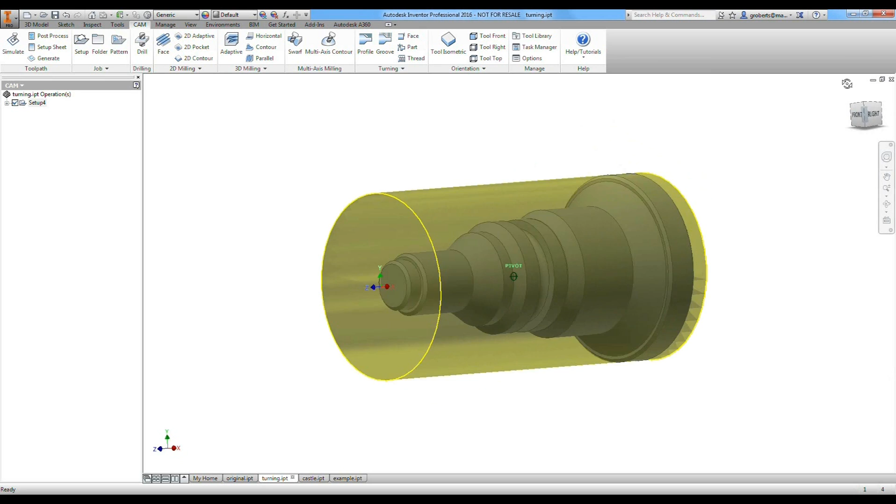To start off, we'll be working on this little part. It's just a basic part where we're going to be using a facing toolpath, a profiling toolpath, a grooving toolpath, and finally we'll part it off. A bit later on in the webinar, we'll go on to use a lot more of the turning features on this more complex part. So we'll be using the chamfer toolpath, we'll be using threading, we'll be using a 2D contour because this is a mill turn operation. We're using drilling and tapping, and obviously we'll part it off again.

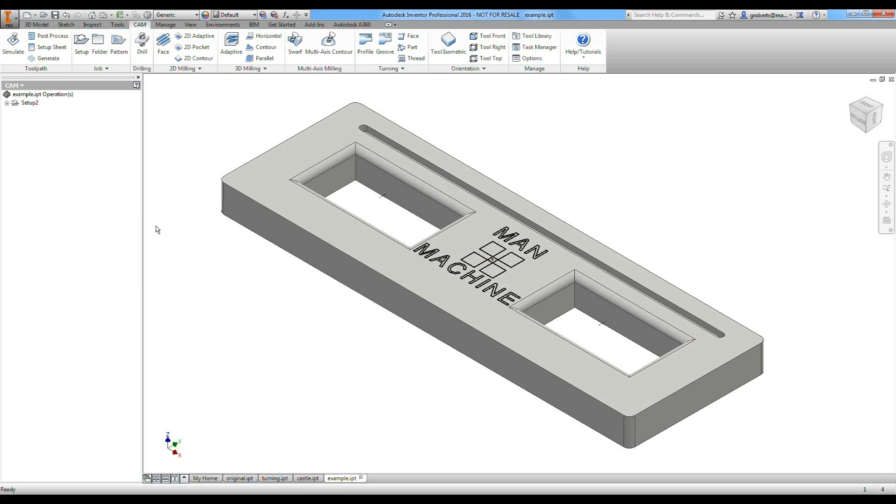As well as the turning features, I'll go through a few little tips and tricks you can use just to finish off the edges of fillets. I'll go through engraving, because these are a few questions that we've been having before. How to engrave, how to finish off fillets, and how to do a slot toolpath, as the slot is different to a 2D pocket. So we'll come on to that a bit later on. And I'll show you a few examples of turning features. So we've got just a little castle here, which is using mill turn.

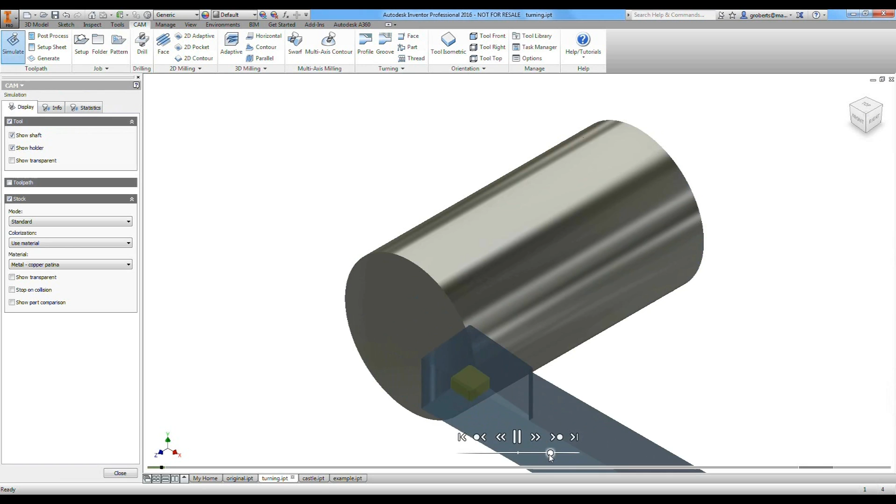Okay, so we'll start off, we'll just work on this part. I'll run a simulation first to show you what we should end up with by the end of the creation. So we're going to face off, to start. And then we'll run a profiling toolpath, speed it up a bit. We'll run grooving, and then we'll part it off. So this is the finishing part that we should end up with.

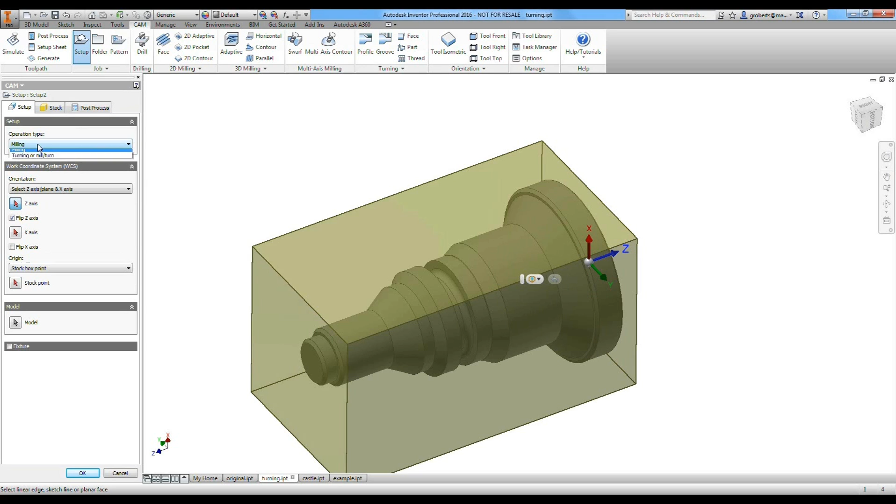So we'll go ahead and we'll close the simulation, and we'll minimize this setup, and we'll start from scratch. So we'll create a new setup, and you'll notice that there's a new option been added in here inside the operation type called turning or mill turn, which we'll select for now, and we'll just set the Z-axis to be about this circular here, and we'll set the origin to the stock front.

So we can go into the stock section and we can change the mode now to fixed size cylinders, tubes, or from a solid. For this demonstration we use a relative size cylinder, and we'll say there's a radial offset of 0 mm. So we've got some stock on there which is basically cut to the outer diameter here. And we'll just give it a name, we'll just keep it as 1001 for now, and press OK. And we've got the setup in.

So the first operation we're going to do is a facing toolpath. So we'll just click face here. And we'll just choose a tool, same as we would if we were milling. We'll go into tool by type, but instead we'll choose any turning tool. And we can just choose one of many tools that are in here. If you want, you can create a new tool by just either making a library or going into the part you're doing now. So we're using turning part.

And we'll choose new turn tool. And you can see there's a little preview of the tool that we're making here. We can head over to insert, and we can define a lot of different inserts inside here. We can set the size of the inserts, we can set the cross sections, which are for the inserts as well, and the tolerances, the relief angles, and obviously the thicknesses.

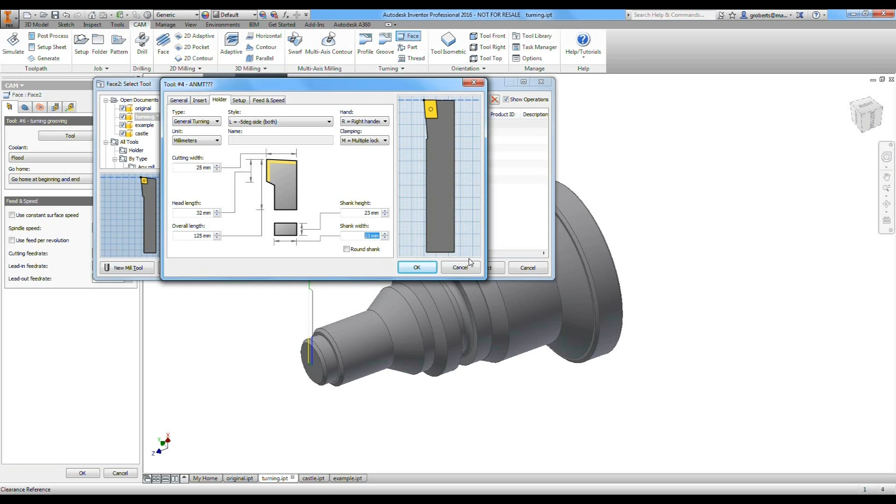You can also set different sizes of holders. We can take the holder off. We can set where it's clamped. We can set if it's left hand, neutral, or right hand. And we can set all the widths and the heights of the holder. For now, I'll just use the default ones that we've got in here, and I'll just select this one at the top. Press select. And we've got the tool in here now.

So we'll go over to the confinement section. We don't need to confine it because we're just going to be facing the part off. So we'll just leave all the other tabs now. We'll keep lead in and lead out and press OK.

And now I'll run a simulation just to show you the facing toolpath. You can see the tool's just going a straight line down to face off the part to the model front.

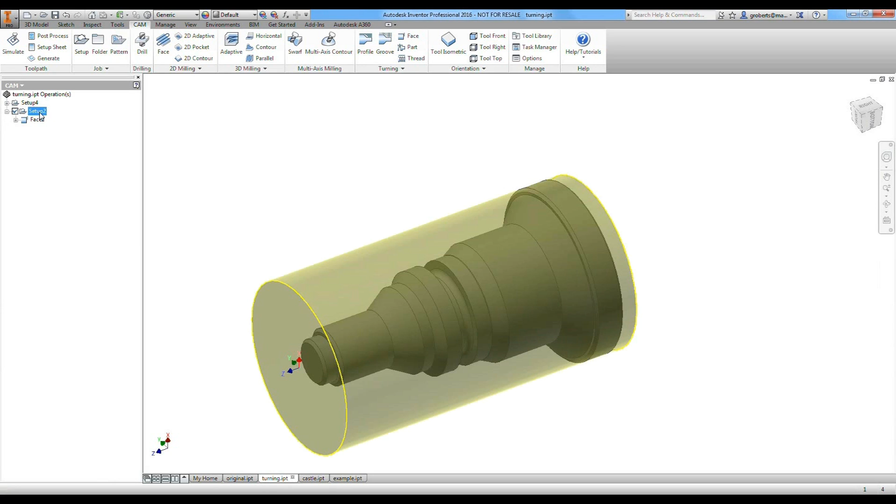The next option we want to create is the profiling toolpath. So we'll just choose profile. And we'll use the same tool for this, so it's already selected from the previous operation. And we'll untick Allow Grooving. Obviously we're using the profiling tool for now, so we'll untick Allow Grooving.

We want it to go from the front to back, and it's going to be outside profiling. You can use this option for inside profiling, and you can change the orientation of the tool if need be. So we'll just set that to 0 now, so it's a straight tool. We can set the spindle speed and the lead in feed rates and the cutting feed rates here as well. But I'll just leave them for default as this is only a demonstration.

And we'll go into the next area. We can leave confinement, but we'll tick rest machining as we've already faced up the part and we don't want it to go over there. We'll head over to the passes tab. We'll untick finishing passes for now, and we'll keep the roughing passes. Go to linking, and we'll keep in lead in and lead out moves. Press OK.

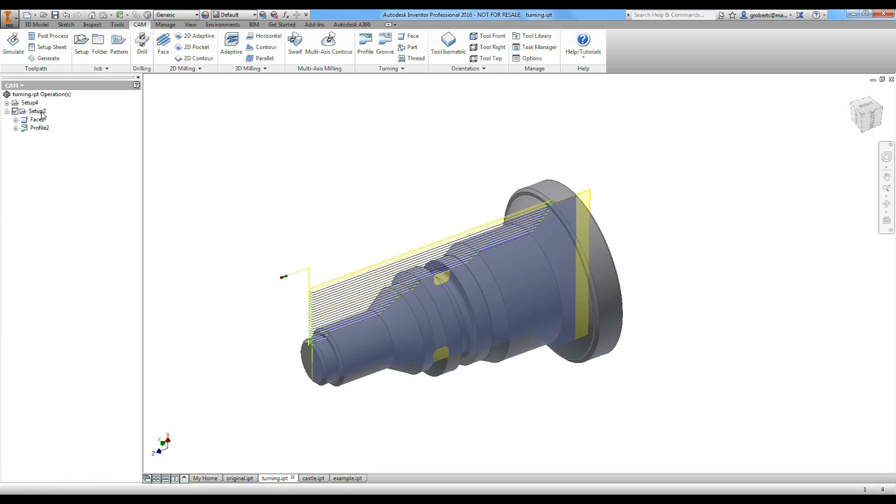And again, we'll run a full simulation, and we'll see the part be faced off. And now I'll speed it up a little bit. It can take a while. And we'll see the part being profiled now. The collision detection worked exactly the same as in milling, so you'd see at the bottom a red icon if there was a collision, and we can set it to stop on collision if needed. But there's no collisions in this, it's just a simple part.

So we'll close this simulation down, and we'll go ahead and we'll create a grooving toolpath now. So we'll just choose Groove, and it's automatically selected a grooving tool for us. But we'll go into the library, and we can just select another one if need be. But we will just use the one that's been selected, and press Select.

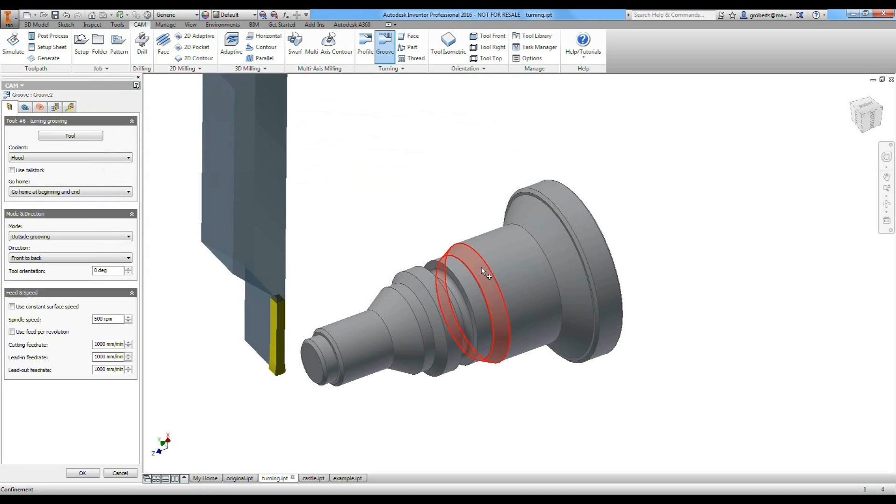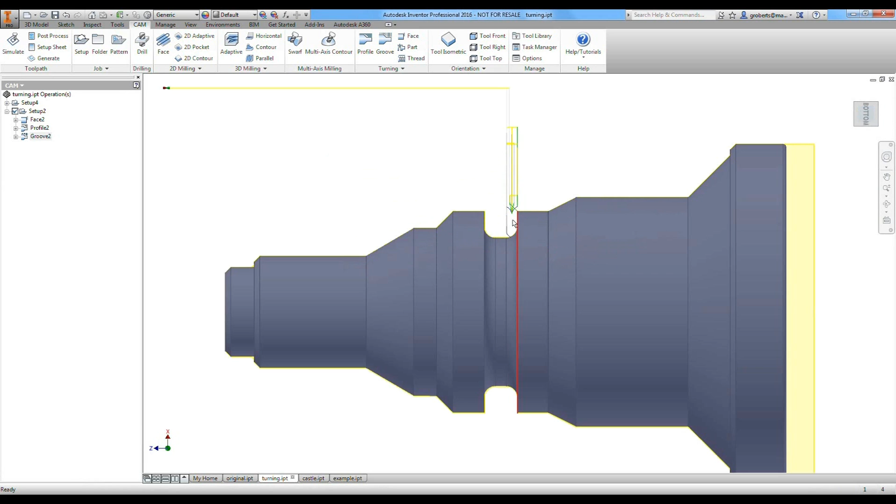And we'll go to the Geometry tab, and we'll choose Confinement. And we'll say Confine within this area. This is only going to groove within these areas that's been selected now. And I'll just press OK. And you'll see the grooving toolpath been added in. So we can run another simulation on that. And we'll jump to the grooving operation. You see that the grooving has been done. And we'll close that up.

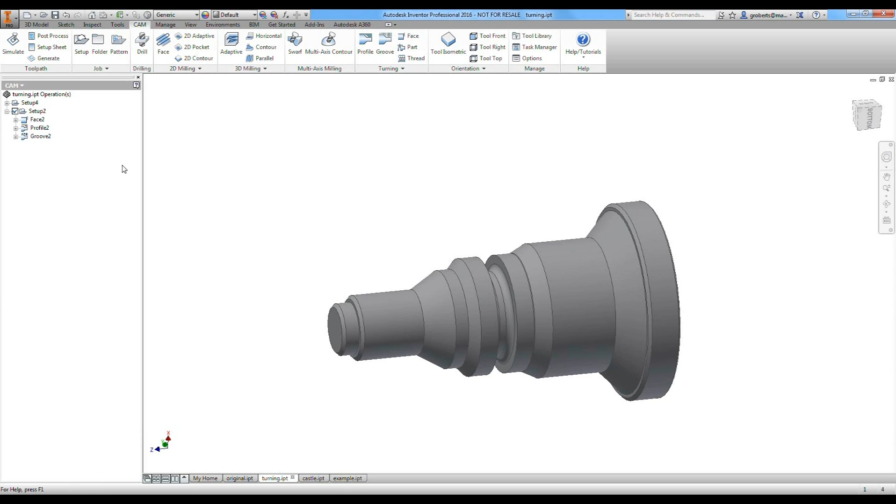So now the final thing on this part is to part it off. So we'll just choose Part. We'll keep the same grooving tool and press OK. So now we've got it parted off. So the whole job will be finished now, and we'll run a simulation on the whole part. I'll just jump across the sections. So jump to the grooving. See grooving is done. And then you'll see the final toolpath parts off.

And that's this file finished. We've gone through the facing toolpath, profiling, the grooving, and parting to finish the part off. So we'll leave this part now and we'll go on to a more complicated one.

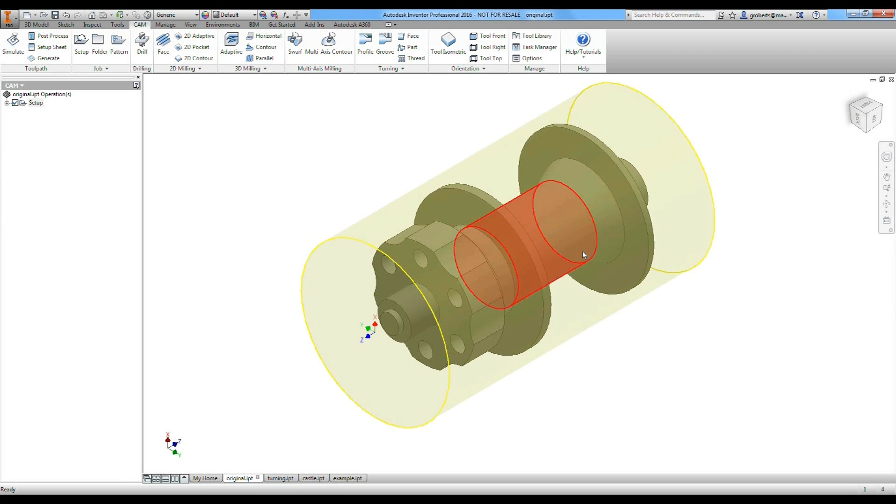What we've got here, we're going to use quite a few more of the strategies. Like I said before, we're going to use 2D profiling, we're going to use drilling, tapping, threading. We're going to use a chamfer, so we can add a chamfer on even if it hasn't been drawn. And then we're going to part off again.

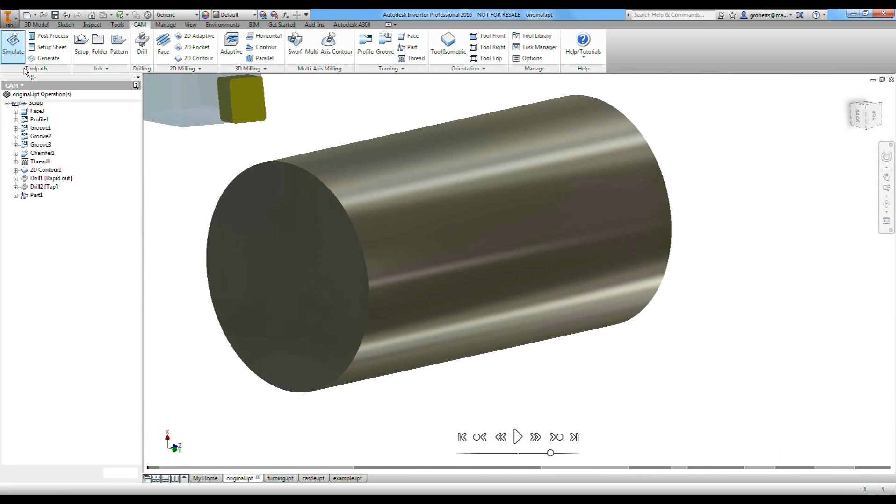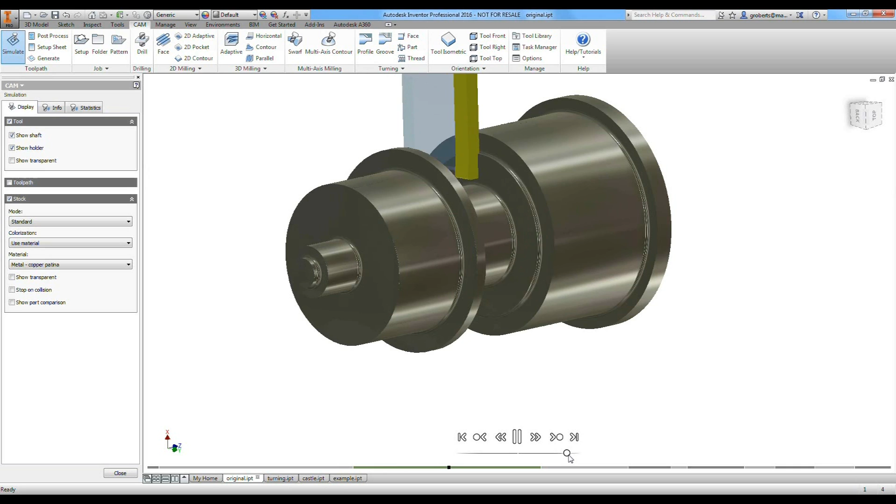So I'll run a simulation to show you what we should end up with. So I'll play the simulation, just face it off. Now we're going to be profiling. I'll speed it up a little bit. So it's going to go through and just profile the whole part first. And then it will come and groove the centre part which I've selected. And then after this it will groove the rear of the part.

And then it will come and groove the front of the part. So after that it puts a little chamfer on, and it threads the part. It does a 2D contour, drilling, tapping, and then parts off. So we should end up with this as our finished part. It'll be quite a complex file if you're going to program this manually, but this will show you how easy the turning features are in Inventor HSM.

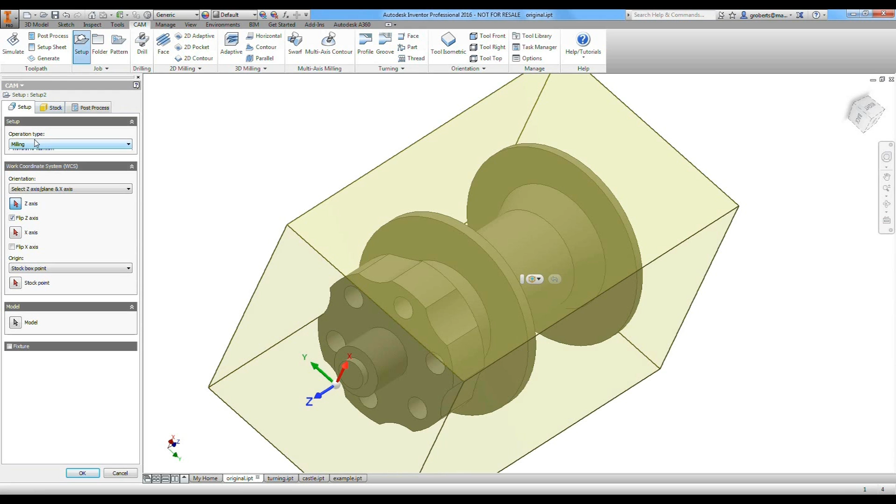So we'll close down the simulation, and we'll minimize the setup, and again we'll just work through it from scratch. So we'll create a new setup. We'll change the operation type to turning or mill turn. We'll choose a Z-axis, and we'll make sure it's from stock front. We'll keep the Z-axis on this side.

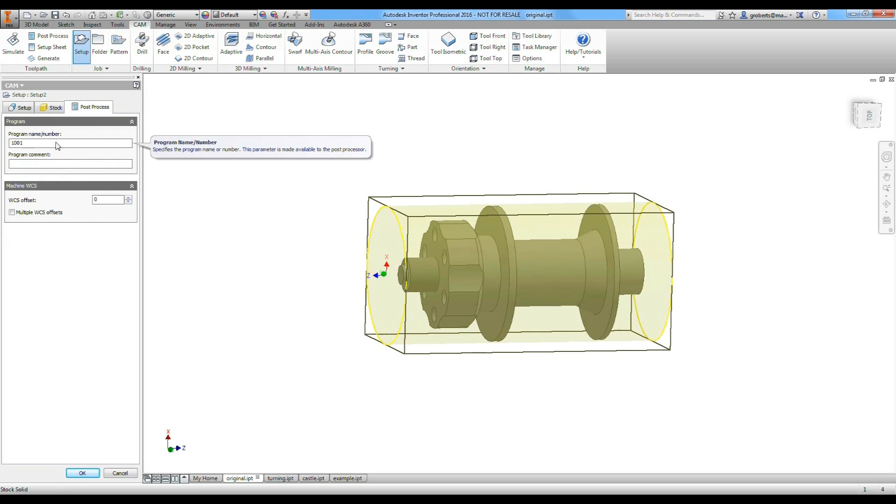And we'll come over to the stock. And it's a fixed size cylinder now, which is a bit too big for what we're doing. We'll say it's a 45mm diameter cylinder. And we'll give it a name, so we'll call it 1002 this time. And press OK. Okay, so the first operation we want to do again is face off.

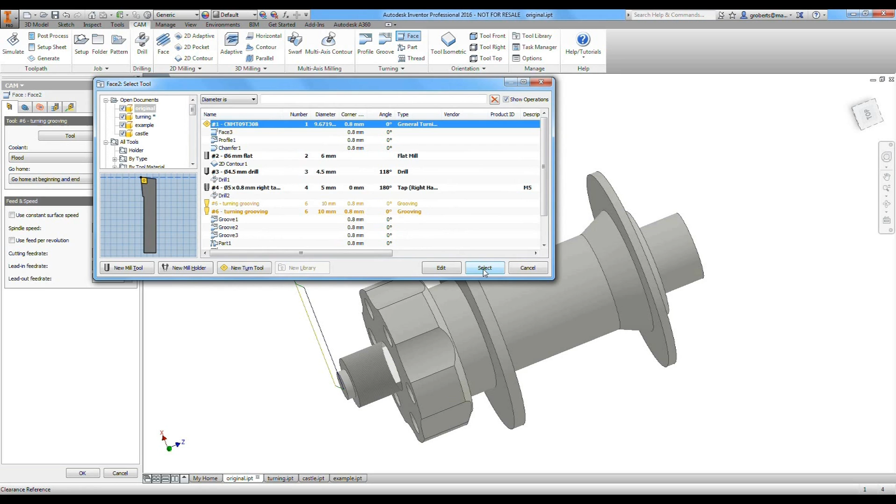So we'll choose face. And again, we'll choose a grooving tool, a profiling tool, and press select. And then just press OK. We'll keep the default feeds and speeds. And we've got the facing toolpath done, so we'll run a quick simulation just to check there's no collisions. And that's fine. So we'll close that off.

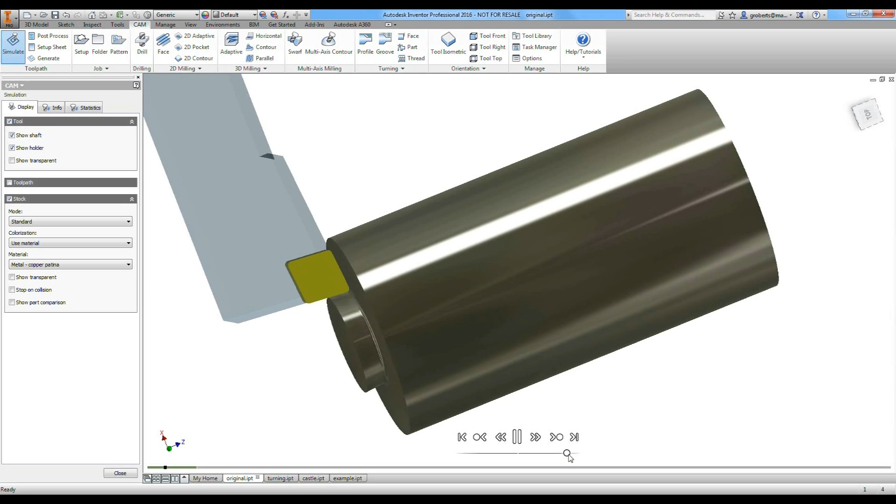And now we'll go over and we'll choose to profile the part. So we'll use the same tool again. Disable allow grooving. And we'll untick finishing passes for now. And we'll press OK. So now we've got the profiling operation done. We can run simulation again and check for collisions. And you see there's no collisions at the moment. None are showing up at the bottom. So that's fine.

Now the next operation we're going to do, again, is a grooving operation. So we'll just choose groove. And we'll confine it this time between this area and this area. And press OK. And then we'll create a derived operation. So this is going to keep all the speeds and the selected tool. And all we're going to do is just change the confinement area. So I want to now confine it from the front here to here. And press OK.

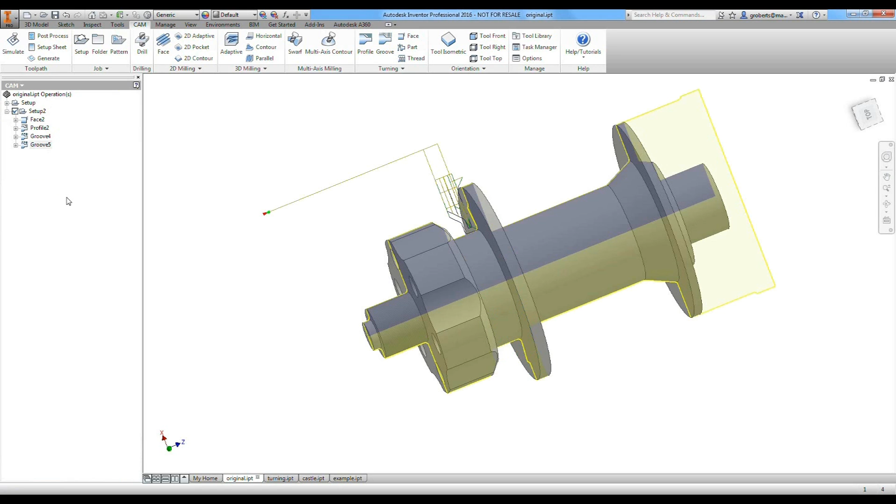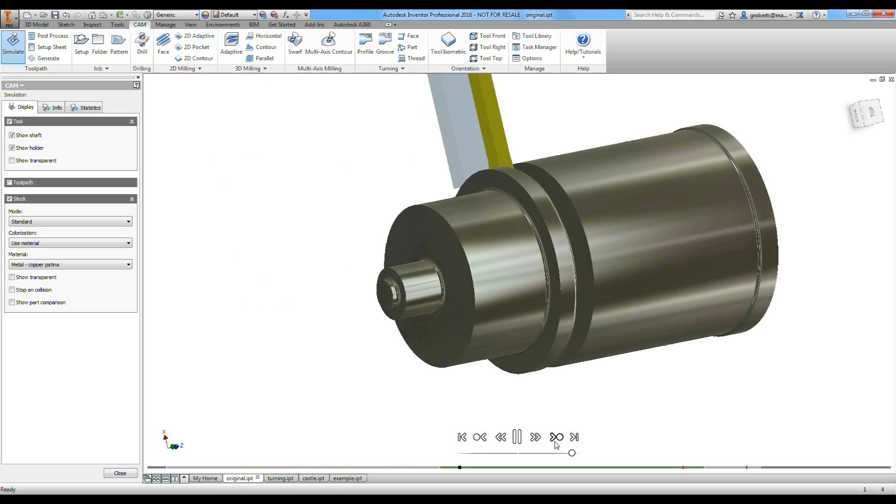And then we'll create another derived operation. And we'll confine it from here to here. And press OK. And that's going to groove off the back. So we'll run a simulation now and just check if there's any collisions, which we can see there's a few here. We'll run it through and see why they're colliding. You can see it's grooving. And looks like it's on the finishing pass it's colliding.

So I'll turn off finishing passes for the grooving tool just for these first two operations. So we'll come here and we'll untick finishing passes. And we'll do the same on this one. I'll untick finishing passes. And then we can check the simulation for collisions. And you can see now there are no collisions. So we'll close down the simulation.

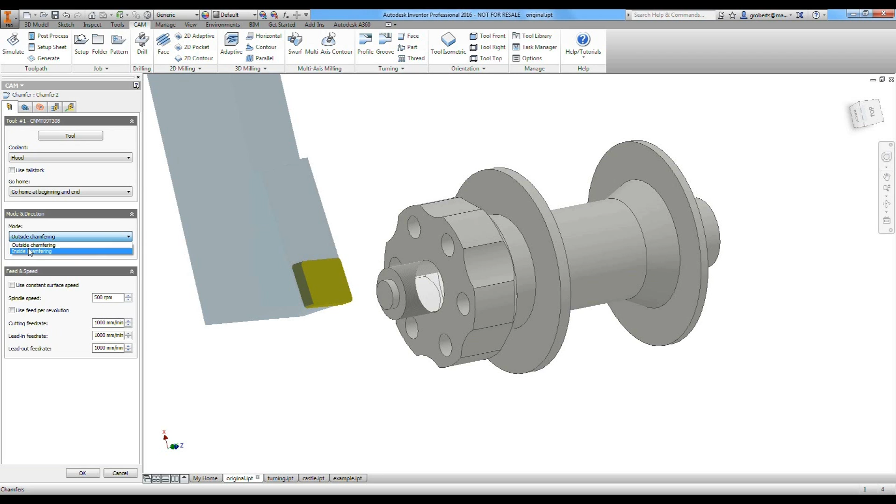And the next thing we want to do is add a chamfer onto this edge here. So we just expand the turning tab. We choose chamfer. And we'll choose our profiling tool that we used first. So it's outside chamfering we're doing. We can choose it to do inside, but for now we'll just choose outside chamfering. And we'll choose the outer edge to chamfer.

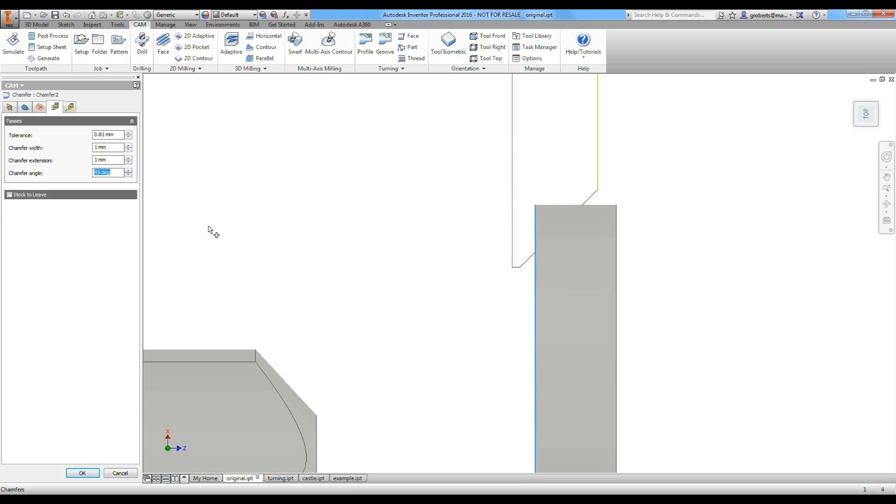So you can see the preview of the toolpath is adding a chamfer which goes through the model, so the chamfer doesn't need to be modelled. You can just do it on any edge that's selected. And you can set the chamfer width, the chamfer extensions and the angle all in this passes tab. So I'll just set this as a 45 degree 1mm by 1mm chamfer. And we'll leave everything else. And press OK.

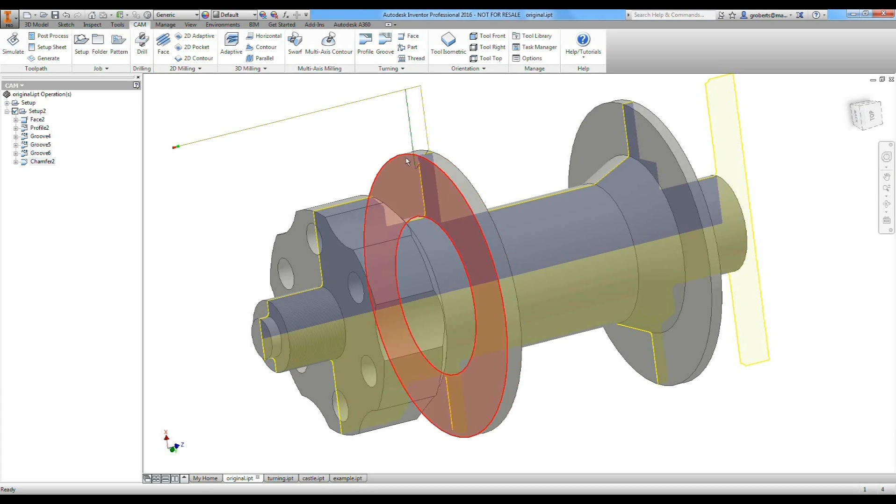And a good way to see the chamfer, because when you run a simulation the model is always visible. So if you cut through the model, you'll see the model behind, which obviously the chamfer is going to be cutting through. So a nice way to see the simulation is to switch over to the model tree and right click on solid bodies and just hide the solid bodies. Then switch back to the CAM tree and run a simulation. This will give us a better visual simulation, as we can see the chamfer, and we won't see the model sticking out from the stock.

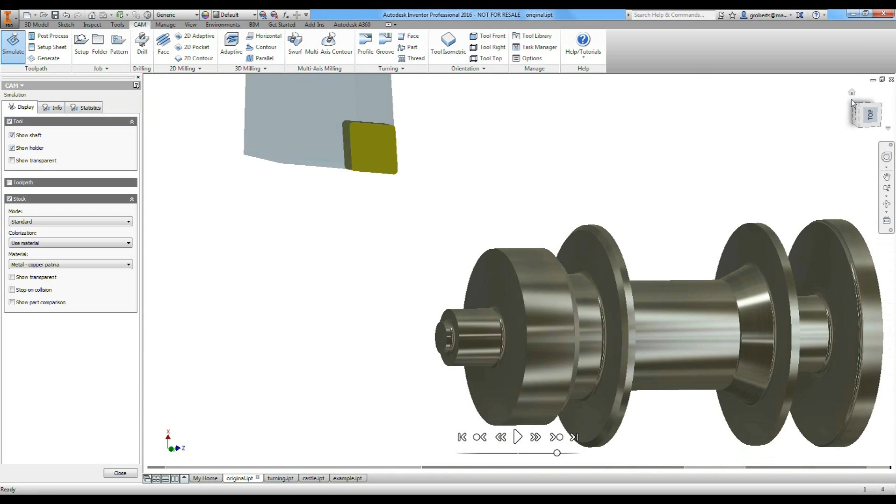So it's running the grooving passes, and then it comes through and it will add a chamfer on. And as you can see, the chamfer's been added on with the profiling tool very easily. So the chamfers don't even need to be modelled. You can just select them, and it will put the chamfer on for you.

So we'll close down the simulation, and we'll just make the solid bodies visible again. And we'll head back to the CAM tree, and we'll make a 2D contour now. So we're just going to cut around the edge of this part. So we'll choose 2D contour, standard milling operation, and we'll choose the 6mm flat.

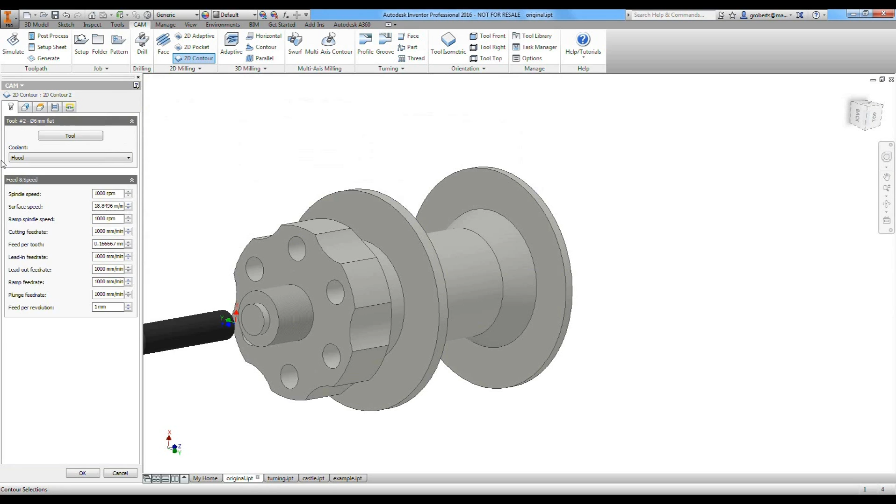And we'll select top contour, and I want it to come down to the bottom height here. Just going to mill down to the bottom. I can set it to go to the bottom there, and then press OK. And you see the 2D contour is added on like so.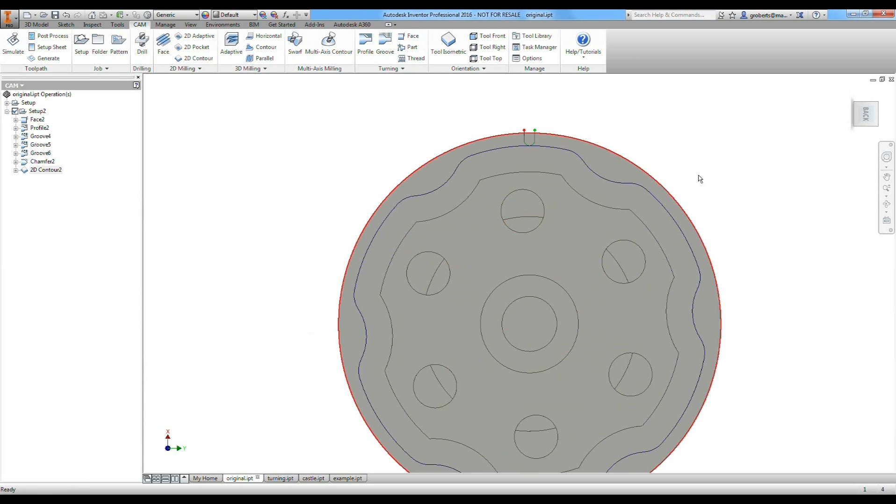So we can do that with all milling operations, as this is a mill turn program. You can choose any mill turn or milling operations, and they're all accepted inside the turning. So another one we're going to choose is drilling. So we'll just choose drill, and we'll choose a 4.5mm drill, and we'll select this whole face, and then choose select same diameter.

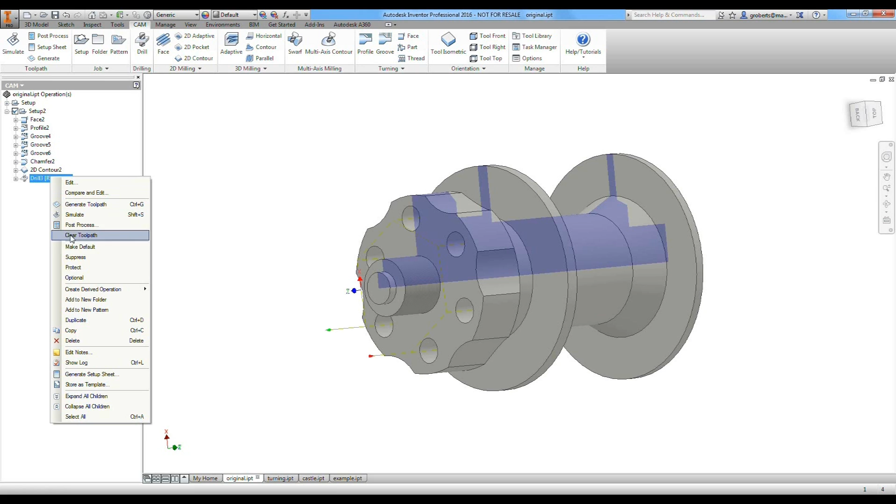So now we'll just press OK. We'll leave the standard drilling cycle, just drill in and rapid out. We could change this to pecking if we wanted, but for now we'll just leave the standard one. And we'll right click, create derived operation, drilling, drill, and we'll change the tool to a tap.

So we'll use a 5mm right tap. And we'll switch over to cycle, change the cycle type to right tapping, and press OK. And now we've got drilled holes and tapped holes.

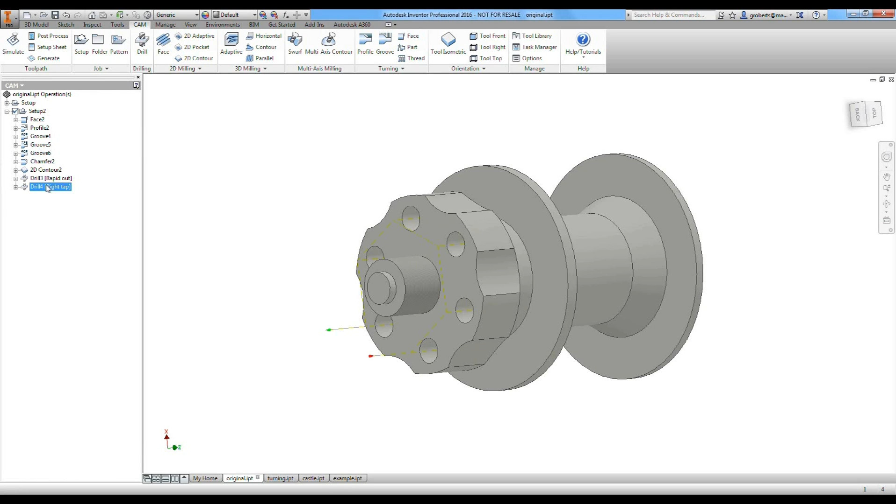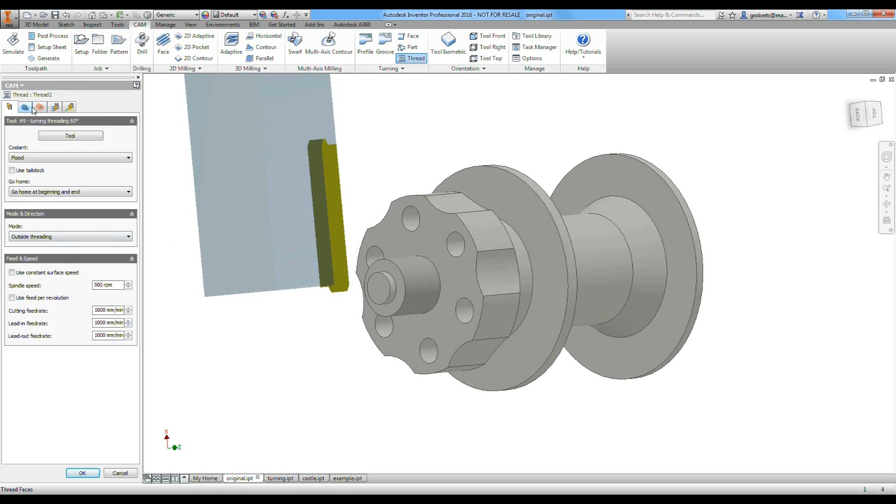Okay, so the next thing we'll go through is we'll put a thread using the turning feature called thread on this front face here. So we'll just choose thread, and it's already selected a default threading tool, which we'll keep for now. It's set as outside threading, which is fine, because we're doing outside threading. And we'll choose the thread faces here.

And now I want to set a backside offset. As you can see, it's going to go into the model. So we'll set the backside offset as, let's say, -2mm, just to bring the thread a bit further back. And you can see the little angle that's bringing out on the thread. This is going to fade the thread. So if you don't want this angle there, you can just untick that and it will come straight out.

So it's a right-handed thread. We can set the thread depth and the thread pitch in here. I'll leave the default ones for now and just press OK. First off, I'll just show you the number of step downs so you can see here the thread's going to be done 5 times. You can lower that down in here, so say 2, and it will just thread it twice. And just press OK, and that has been created.

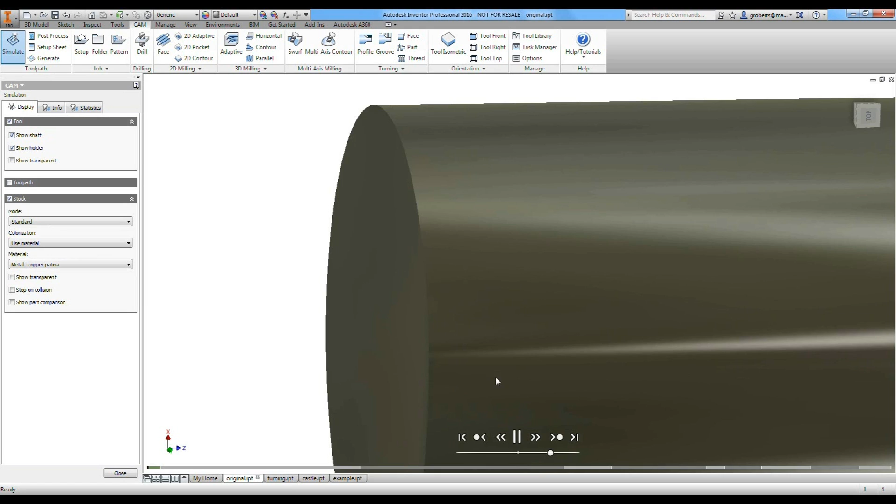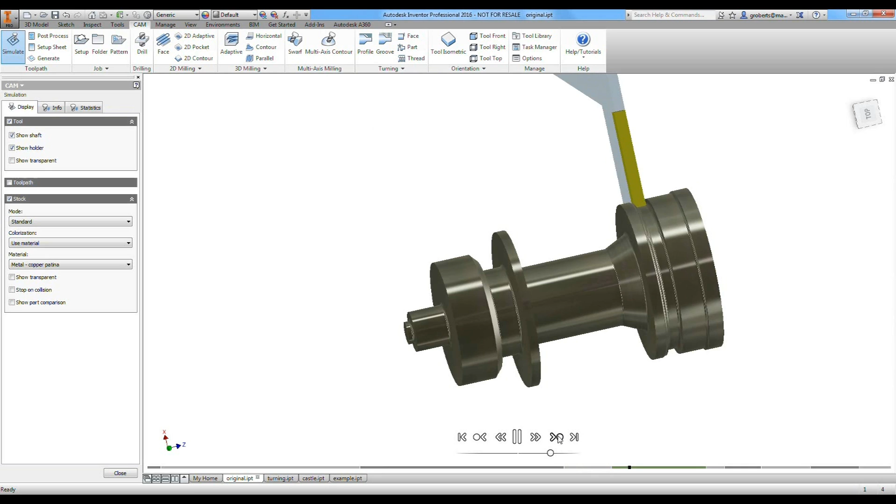So what we'll do is we'll switch off the model visibility again, and we'll run a full simulation on this setup. So it's facing the part, it's profiling, and it comes through, and it will do the grooving, and it will groove the front, and it will groove the back, and it will put a chamfer on, it will drill the holes, then it taps the holes,

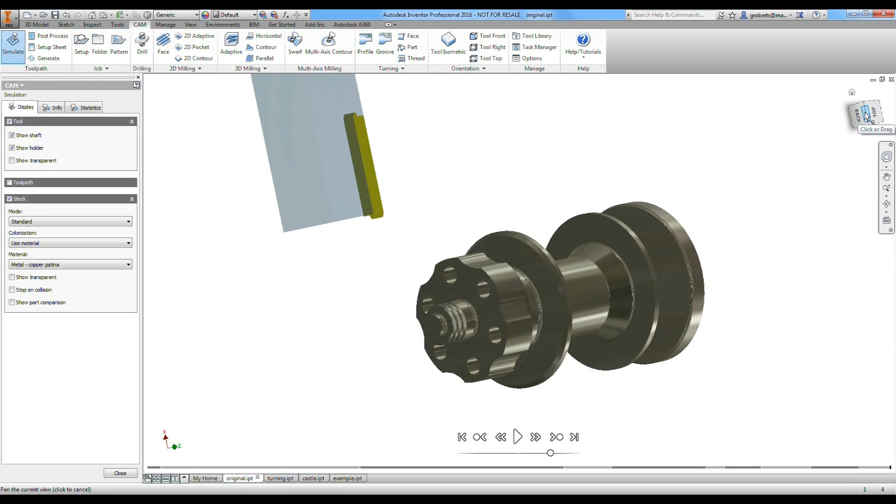and it threads the part. Like so. So now we've got a nice, neat little part there. The last thing we need to do is just part it off. So I'll just choose Setup, and we'll choose Part, and just press OK.

Obviously you can set the speeds and feeds in each section. All here: cutting feed rates, spindle speeds, the lead-in feed rates for everyone, but as it's a demonstration, I'll just leave the default speeds and feeds. And I'll save that part. So now the simulation, I'll just jump through it. It's parted it off, and you'll see that at the end. So that'll be our finished part. Try out the stock.

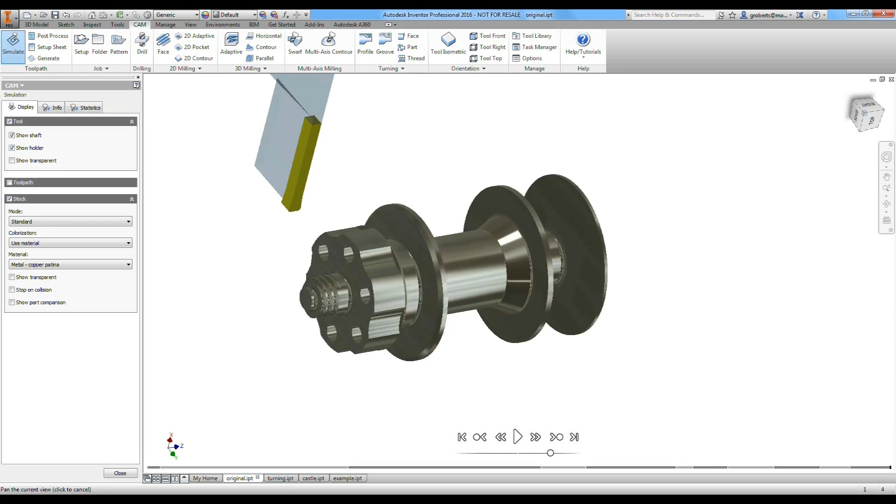Okay, so we'll close this down. I'll show you can change the thread if needed. Again, simple to change the thread. You can just change the depth, say 1 mil, change the pitch to 1 mil. Okay. We'll run a simulation. It's going to be a crash because I'm not simulating the whole part. I'm just going to show you that the thread changes with that.

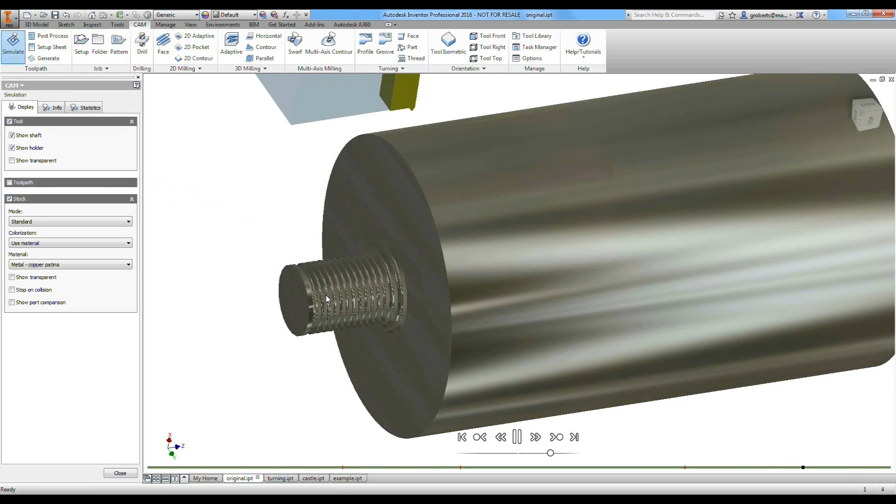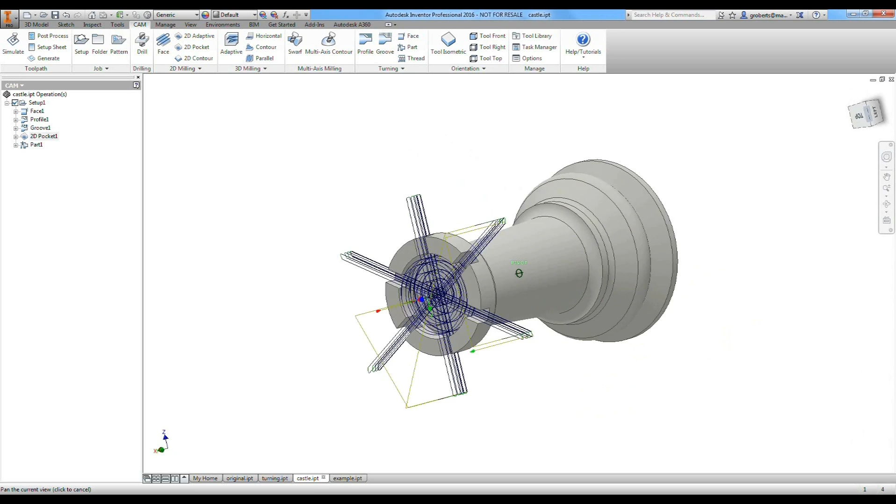Okay, so we'll close down that simulation and we'll head on to another part now. And now we're going to be looking at the castle file I've created. We're just going to be looking at how I've created the milling operations on the front mainly. Just want to show you how I've made them extend, because this is quite a good feature in HSM as well. So I'll just go ahead and I'll edit the 2D pocket to show you what I've done with the selection.

As you can see, I've just selected the edges of each one of these little slots in the top, and I've enabled stock contours for the toolpath to be extended to the limits of the stock. So this is going to drive the tool a lot further than the pocket, rather than just selecting the bottom face, which would leave a little radius on each corner.

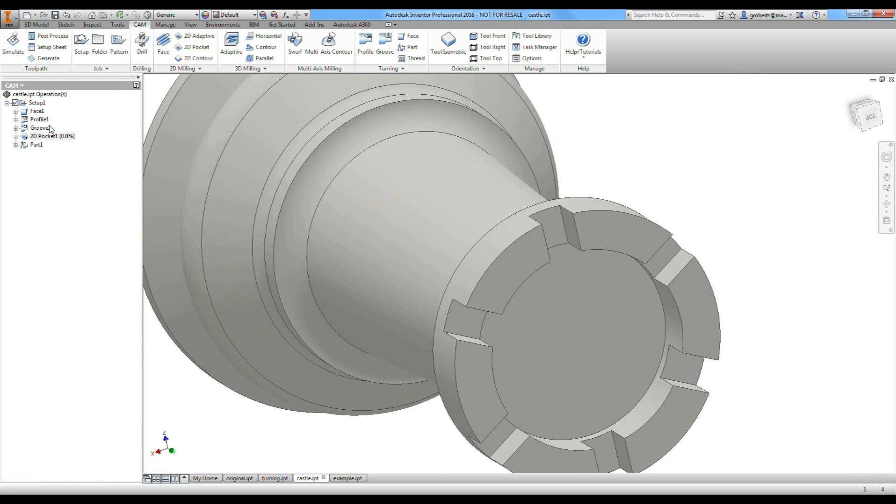This is a way that you can use basically to clear out all the radiuses that would be left. It's quite easy and it's a quick strategy to do. So you just enable stock contours and you just select the bottom edges like so, and press OK. And you see the toolpath generated there.

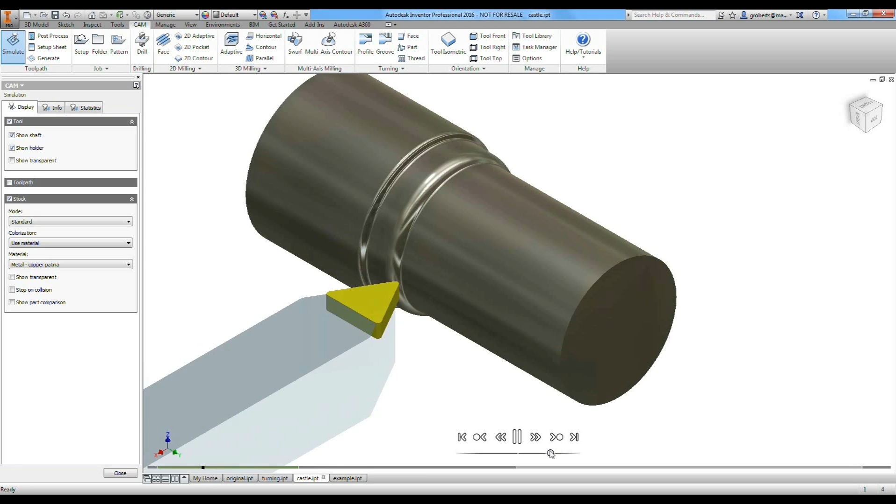So I'll run a simulation on this part and you can just see how the turning and the milling strategies work together. I'll just press simulate and start it. You can see it facing it. Then it will do a profiling toolpath with a different tool. You can see it's a different tool that we've been using before. I'll speed up the simulation a bit.

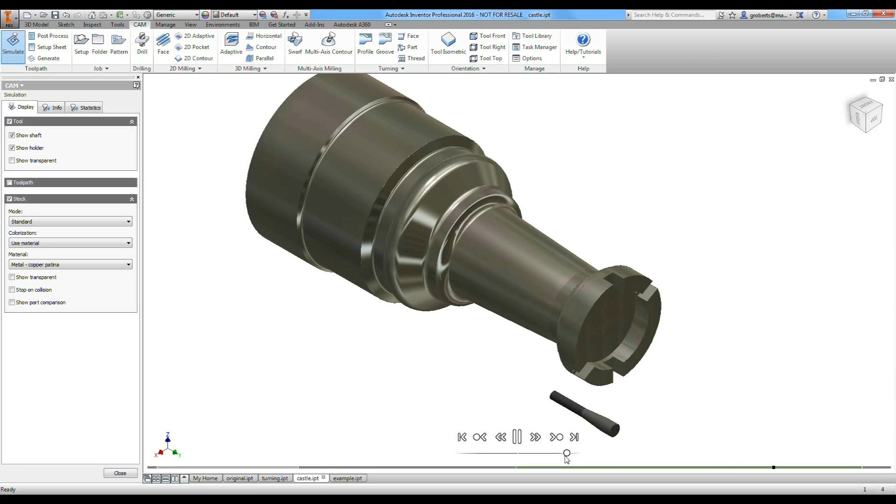And you can see the grooving tool. I've got a finishing pass with this grooving tool as well. Obviously this can be disabled if needed. And then there's the milling operation at the end. And you can see the extended pocket is going to the limits of the stock. And then just parting it off to finish.

So that's the finished part. Again, it's the same strategies that we've used before, and it includes just the basic 2D pocket milling on the front as well. So we'll close off the simulation now and we'll head on to the next example file that I want to show you. I just want to show you a few of the good little features which are in HSM which you don't necessarily use all the time.

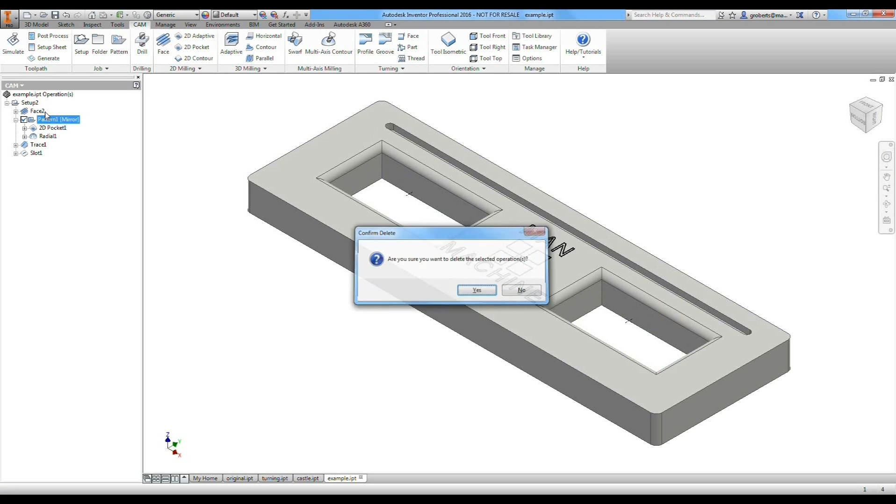So we'll delete the pattern and I'll just create a 2D pocket. We'll just select a 6mm flat tool and we'll select the bottom of the pocket to machine. Just press OK. Toolpath generate, and then I want to click pattern. And for this, I'll use a mirror pattern. And for the mirror plane, I can just switch back to the model tree, expand the origin, and choose the correct plane, so the YZ plane. And you can see the preview, it mirrors straight across there.

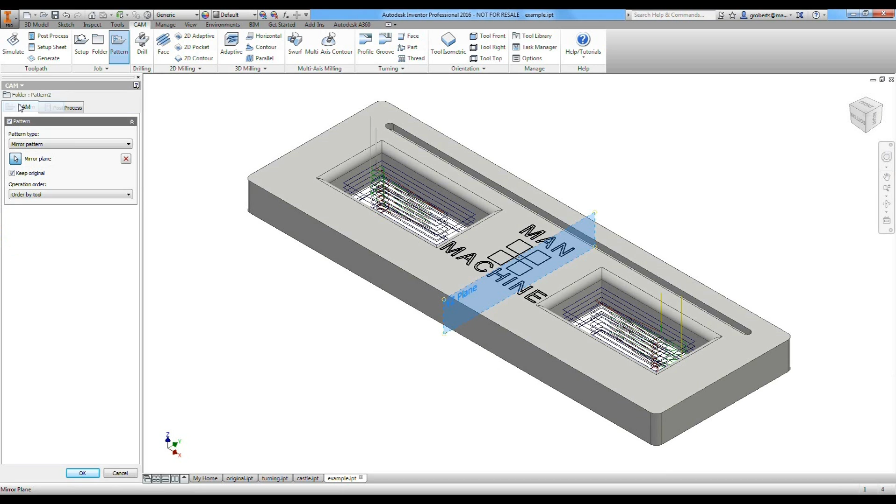And we'll switch back to the CAM tree and just press OK, and you can see it's made the pattern folder there. And I'll run a simulation and it creates both toolpaths. And then press close.

Now I'll go and I'll create a radial toolpath just to show you a nice way of finishing off filleted edges. So under the 3D milling section, we'll choose radial. And we'll select a 6mm ball for this. And we'll go to the Geometry tab.

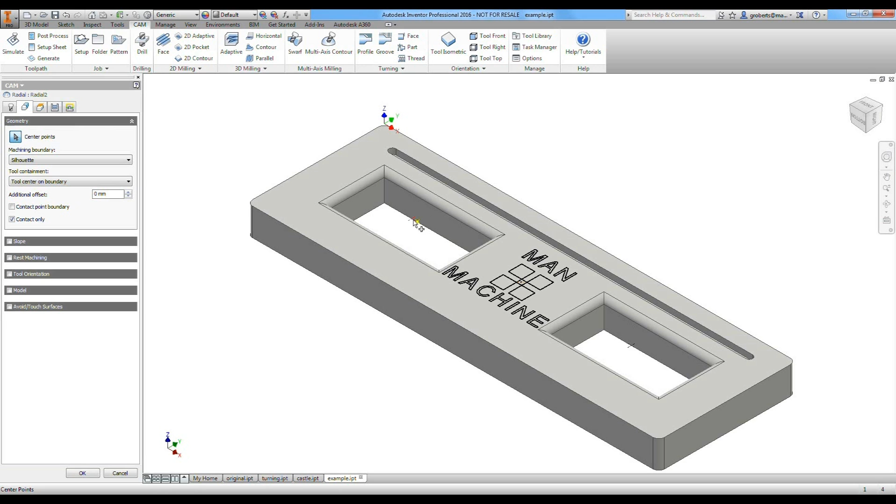So the center point is the center point of the radial toolpath. So we'll just choose the center point of this square, which I've projected to here, like so. And then we'll set the machining boundary to selection, and we'll say we only want the radial toolpath to work within this area.

And we'll keep the additional offset of 0, and I'll show you what that does in a moment. And just press OK. And you can see the radial toolpath being created. It doesn't extend past the top and the bottom. Obviously it does in the linking, but to give a better finish, we want the toolpath to extend past the limits of what we selected.

So we'll edit this radial toolpath, come back into the Geometry tab, and this feature allows us to extend the toolpath past the area that we've selected. So we'll just add it up to 5mm, press OK, and you can see it extends past by 5mm both sides. And we can see it's dropping down.

So I'll show you another feature now. We can limit the depth the tool goes to, so it's not going to drop right down to the bottom of the part. This is obviously a wasted move because it's all been pocketed out already.

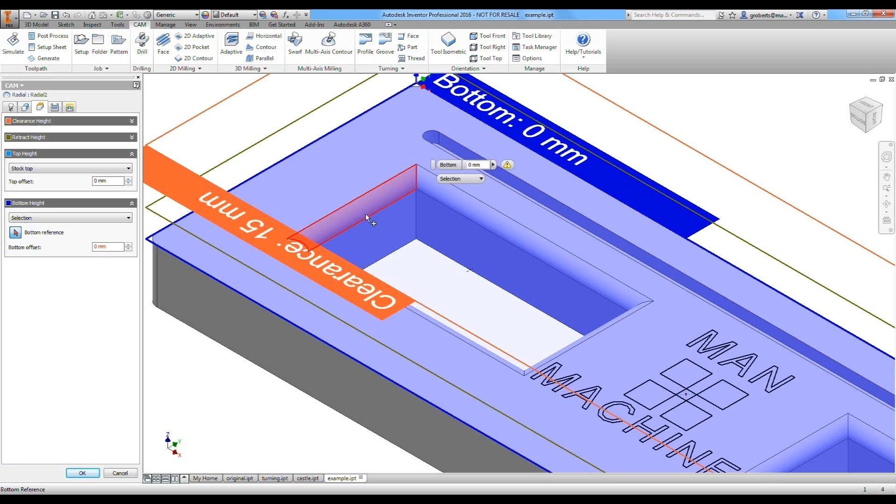So we'll just edit it, go to the Heights tab, set the bottom height to selection, and select that as the bottom height, and we'll put an offset of say -2mm in there, so the tool can drop down to -2 below this line here, and we'll press OK. And you can see that's been generated. So we'll simulate that pattern.

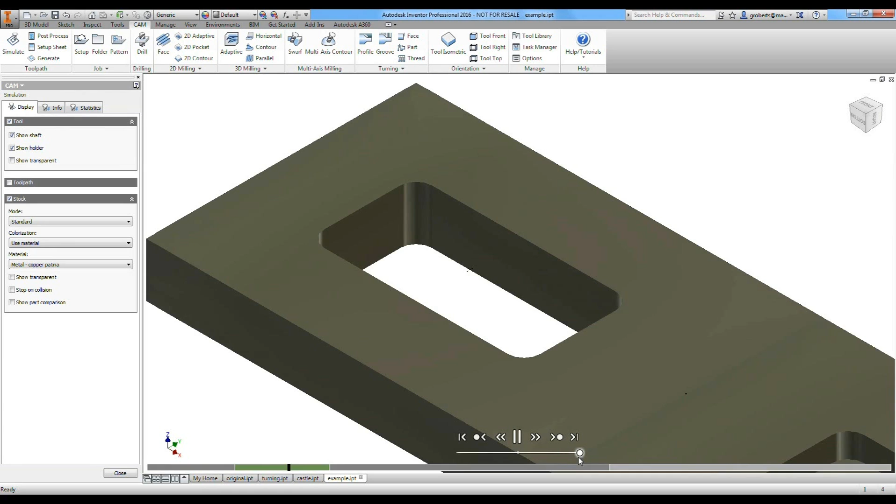Just do quickly the pockets, and then you can see the radial toolpath. It just spirals around, going in and out about this point that I've selected here, the centre of the square, and you can see the centre points here. So this is a good way to finish off radiuses or fillets that you put on your file.

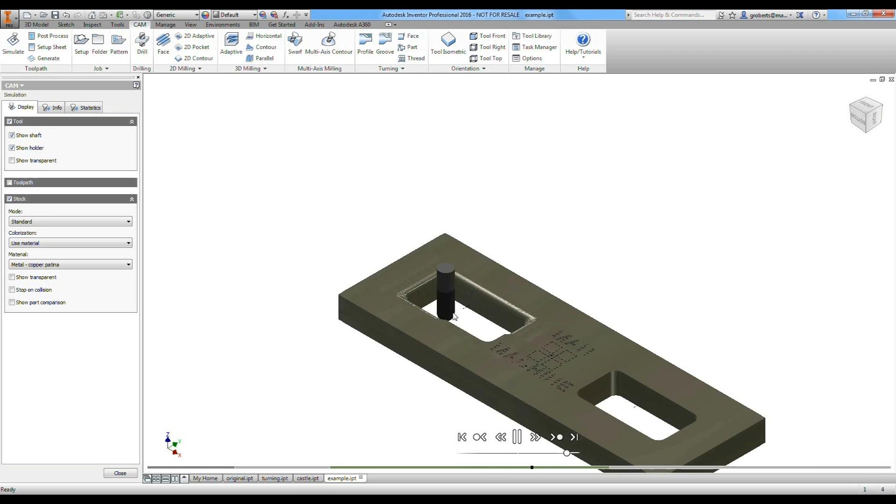It's a lot better than the parallel strategy that a lot of software uses. The parallel would be good on one edge, but then when you come to the next edge, it's just going to fall straight off and miss the radius that you've got on there. So this is a very good strategy to clear out these fillets. Okay, we'll press close and I'll stop that simulation.

And now I'll show you the tracing strategy, how it can be used for engraving. So we'll minimize that and I'll delete the tracing strategy that's already been created. And we'll just go through and create another one. So save the part, 2D milling, and trace. And for this, I'll use a 1mm ball.

And now I want to select the geometry. Rather than using the traditional way of selecting each line, we can do it a lot easier way. Similar to how we selected in the pattern folder, we can switch back to the model tree and just select a full sketch. So we can select sketch 7, which has got all the writing on, and then just go straight back into the CAM tree. So it's a very good feature and a very good way of selecting the sketches.

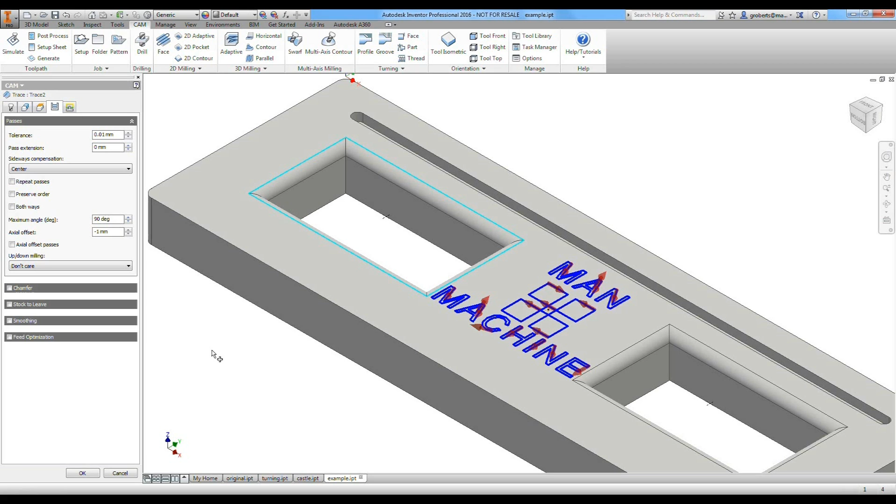So we'll just go over to the Passes tab and we can set an axial offset of -1mm. This is going to drive the tool in -1mm from the surface because this sketch is drawn on the surface. And just press OK. And we can see the heights are a bit wrong. We don't want the tool to lift up that high every time. The part's been faced, so it'll be very accurate.

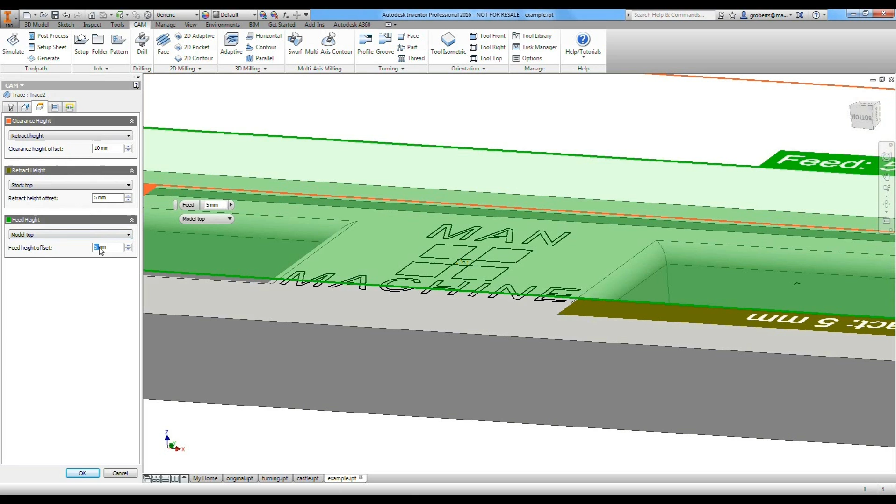So we'll just edit that tracing strategy. Then we can change the feed height, the retract height, and the clearance height all in here. So we'll set the feed height to 1mm, retract height to work from the feed height, say 0.5mm higher. And then the clearance height we'll just set to 5mm from the retract height. And you can see the lines are a lot lower now.

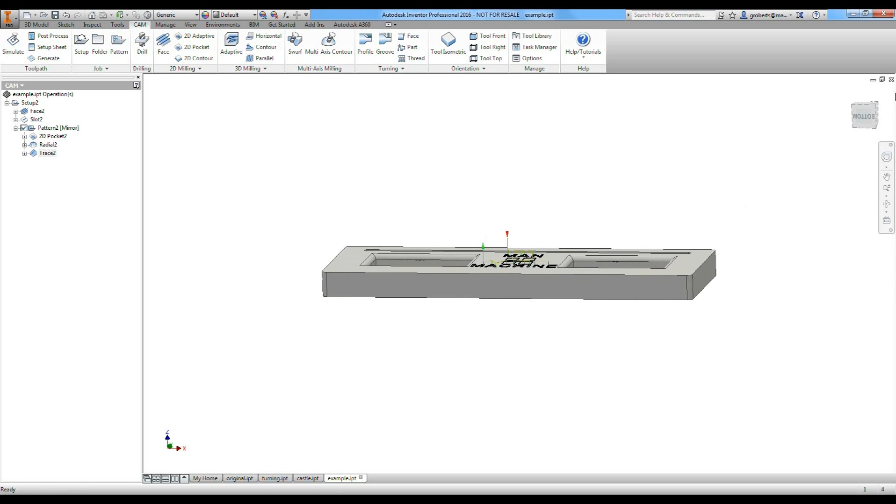Okay, so we'll run a simulation on the trace, and you can see what it's doing. It's just driving the centre of the tool along the lines, and it's driving that a millimetre into the material. So that's where the axial offset feature comes in.

Okay, so that's how you do engraving in Inventor HSM, just using the 2D milling and trace option here. Now I'll show you the slotting option. So we can do 2D slot.

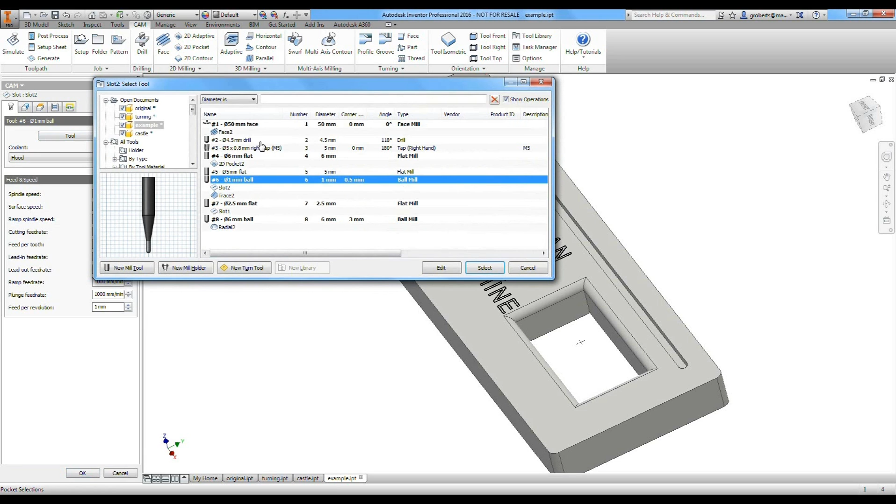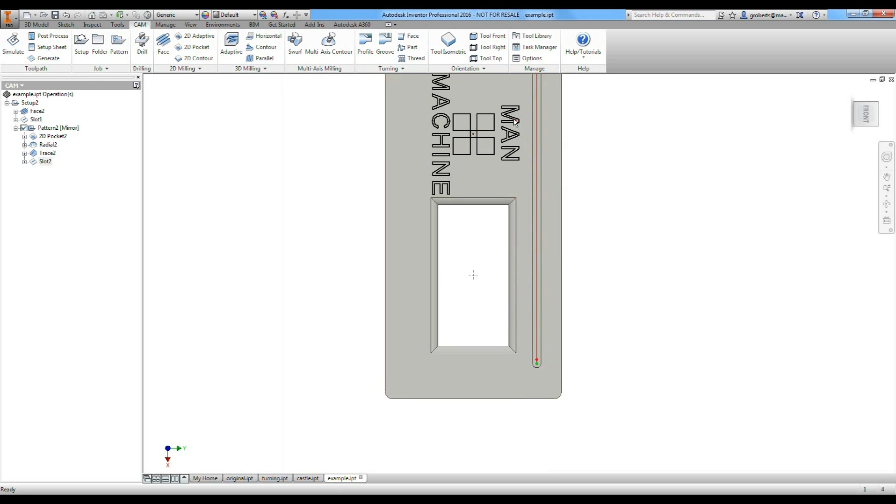And for this, we'll just choose a 2.5mm flat, and we'll just select the bottom face of the slot and just press OK. So you can see what the slot does. It is just going to do a straight line down the center of a slot. It won't try and clear excess material like the pocket and the adaptive strategies do. It will just do a straight line along the middle.

So you will be cutting a 2.5mm slot with a 2.5mm tool, as I am in this. The 2D adaptive and 2D pocket features will fail trying to choose the same size tool, because they are pocketing features, they're not slotting features. So for that you'll have to use this 2D slot.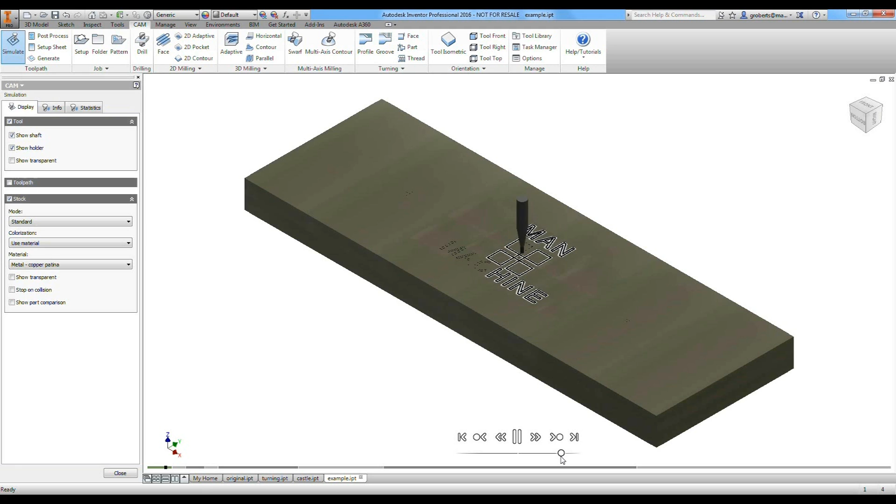Okay, so I'll run a simulation on that, and we'll just drop them out of the pattern. So let's run a simulation. And you can see the slot just does the straight line. So I'll close that off. I'll delete the other slot I've got. And then you can just reorder quite easily by just clicking, dragging and dropping in the order you want the part. So I'll save that, and now I'll go through the post-process tab.

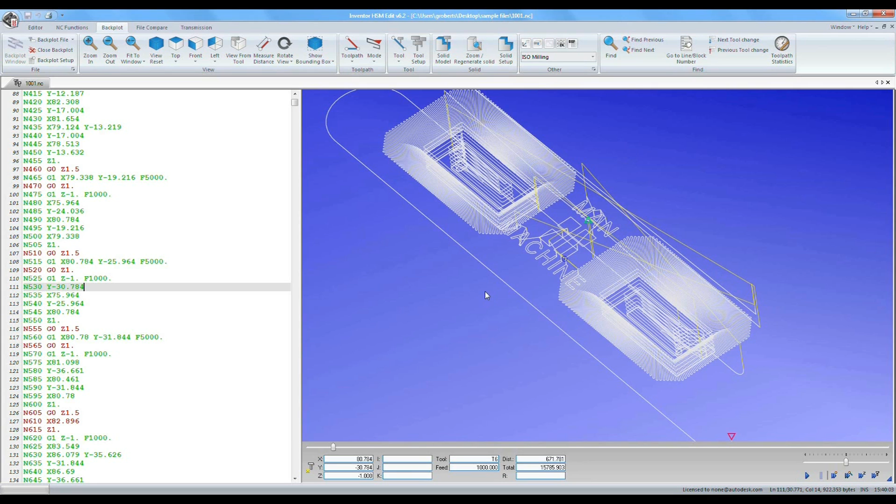So I'll just choose the setup, choose post-process, and now I'll just choose the generic house post, which is here, and just press post. Let's save. And you'll see the NC editor window opens. So this Inventor HSM edit program is included with Inventor HSM. It's a separate application which is just used for editing NC files.

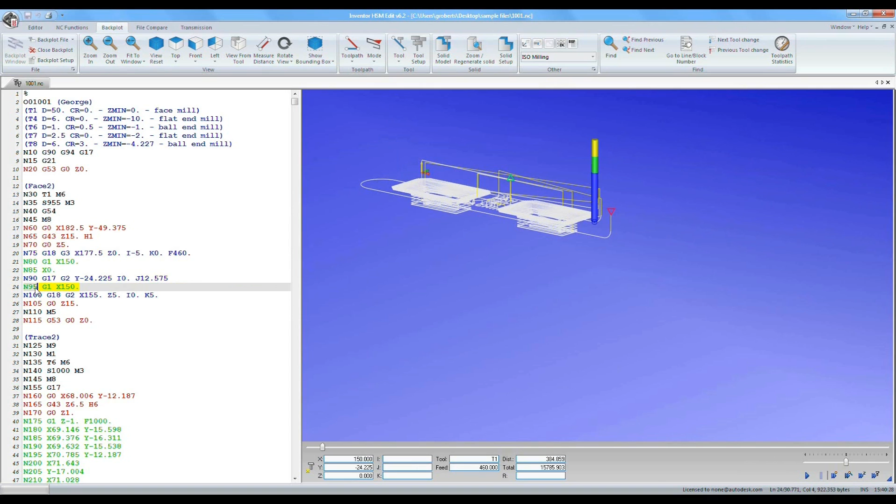You can preview NC files, as you can see on the window here. And it's just a quick text editor which gives you a nice visual appearance of the G-code. You can see all the line numbers are coloured. You can customise the colouring if you want. And it allows for quick access of lines. So let's say I want to edit the G0 line here. I'll just double click and it takes you straight through to that line of code.

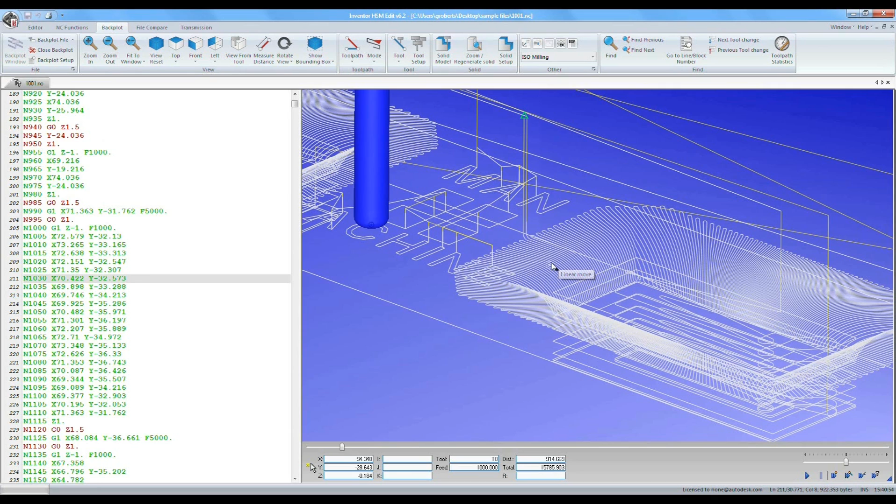You can run the simulation just by pressing the play button, and obviously you can slow it down with the slider similar to HSM, and you can watch the movements the tool is going to be making. And you'll notice on the left hand side here that the code is live feed, so while the simulation is running, it's showing you the exact line of code which generates that movement. So this should simulate what the actual machine is going to be doing.

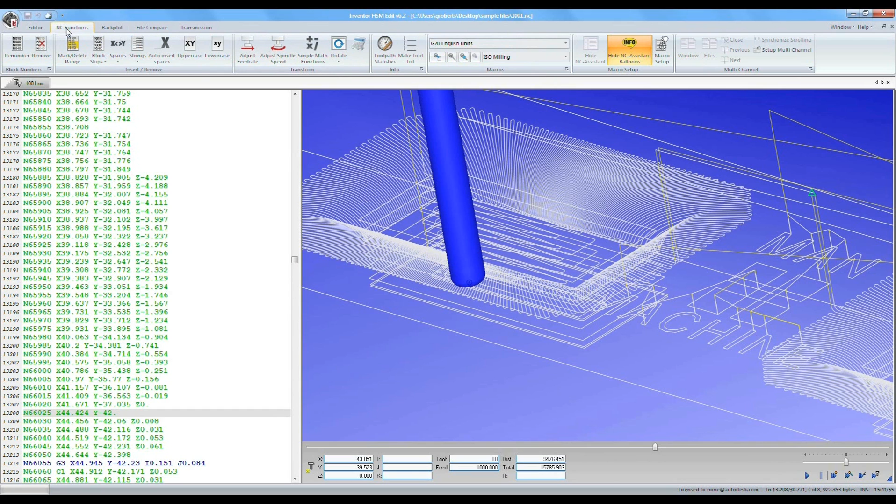This is just a three-axis simulation, and it just uses a generic tool on there, as all the lines are obviously just the center lines of the tool. You can pop over to the NC functions tab here, and we'll scroll to the top so you can see. And you'll notice there's quite a few things you can do in here. You can adjust the feed rate, the spindle speed, you can rotate the toolpath. It's just got a little calculator there. And you also got toolpath statistics.

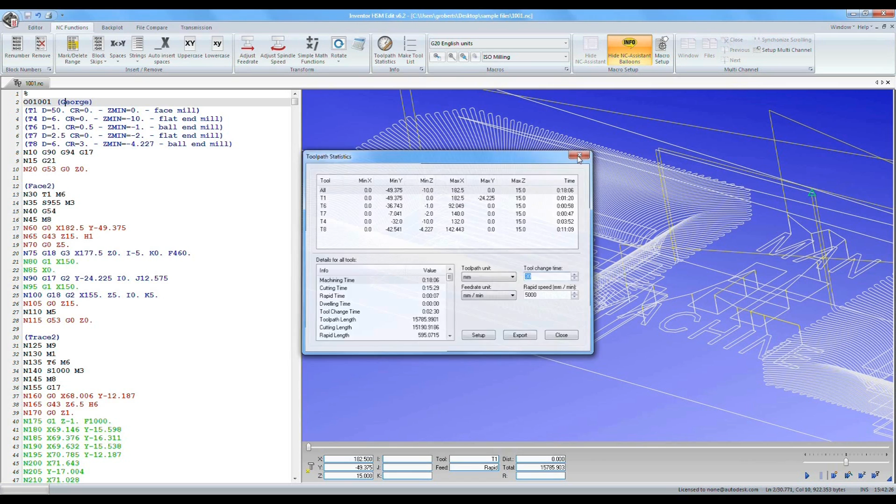So this just tells you the machining time, the cutting time, the lengths, the dwell time, and you can edit the rapid rates and the tool change times here to make it more accurate. I'll just close that down and I'll show you adjusting the feed rate. So you can see here that the feed rate is a meter a minute. So I'll just click adjust feed rate. This adjusts the whole file.

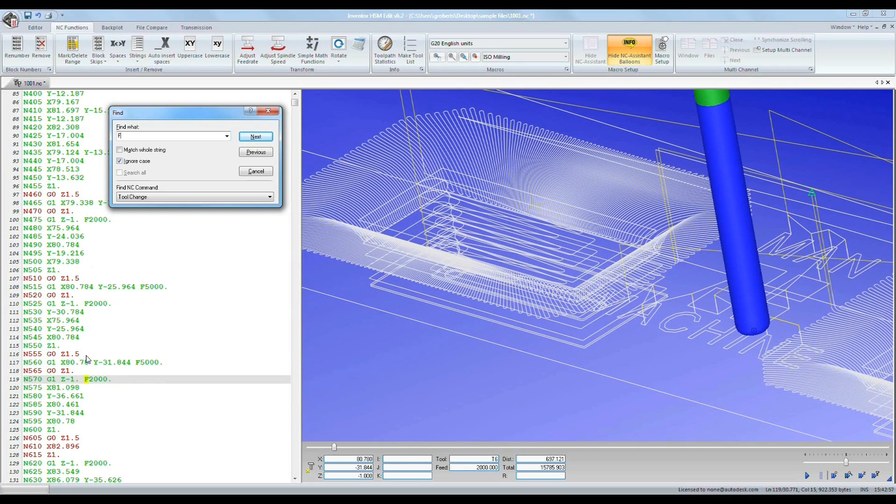So I'll just say I want to adjust the whole file by 200%. So I'll just change the percentage here to 200. I press OK. And you'll notice the feed rate changes here to 2 meters. And you'll notice that throughout the file. So I'll just search for feed rate. So there it's been doubled. All the way through the file, the feed rates have changed. So you can do this with the spindle speed as well.

I'll just go back to the top of the file and we'll just click adjust spindle speed, and we can do it in percentages or we can set a maximum spindle speed value. So let's say our spindle doesn't go any higher than 500 RPM. So we'll just head to 500, and you should see the spindle speed here, so S1000, which is 1000 RPM, should change to 500, as it shouldn't exceed 500, what I entered here. So I'll press OK, and you'll notice the spindle speed will never exceed 500 in the file now.

This is a good way to set a maximum and a minimum spindle speed in the file. So I'll adjust the spindle speed again, set a maximum value of 5000 and a minimum value of 4000. Spindle speed goes to 4000. Again, this is an easy way of editing the files. It's got support for Heidenhain, just generic G codes as well, turning files, and just the standard Autodesk post files. You can also add text files and use the text editor if you want, but it's mainly for the milling, the turning, and Heidenhain files.

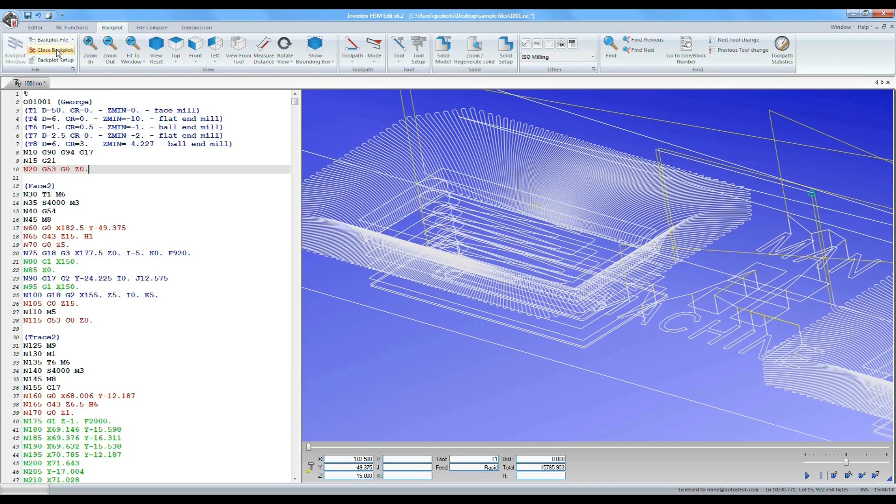I'll just close off the Backplot window, and you can see the NC Assistant tab on the left, and the Cycles and Macros tab here. So this allows us to enter in a line of code really easily. Let's say we want to enter a line of code just after the spindle speed's turned on. Actually, we'll do it after the G17 move. We'll press enter, and you'll see the line numbering is automatically changed. So it's automatically entered a new line number in for us. Press enter again, it will add a new line number. We'll just delete that one out.

And let's say we want to add a rapid move in here. So we'll just double click here, the G00, and we'll enter the X, Y, and Z coordinate that we want. So we'll just enter 500, 500, 20, and press OK. And you can see that line's added in really easily. And this works with all the G codes you've got down the left. You've got G codes and M codes, which are customizable as well. Obviously, all machines use different M codes and G codes, so these can be customizable.

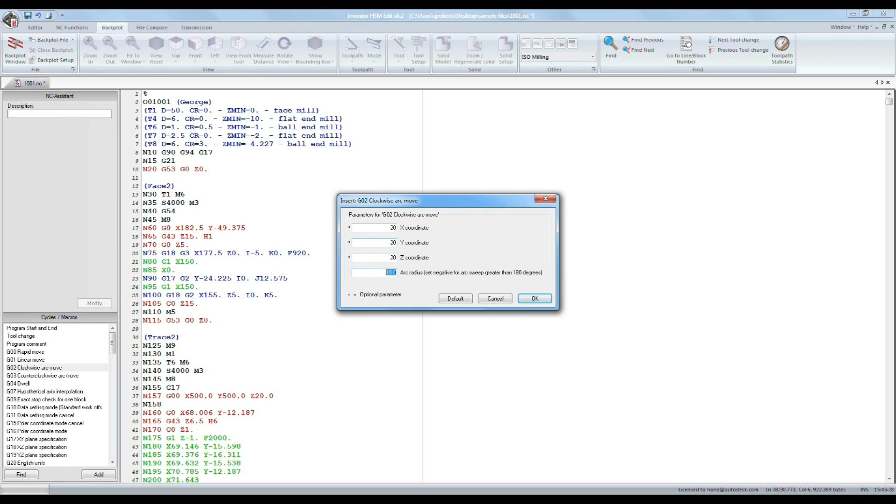And let's just say we want to add in a linear move or clockwise arc move. We can just say the X, Y, and Z coordinate of the arc as well, and then the radius. So we'll just say 20, 20, 20, and the arc of 10. Add the move in for us. Okay, so I'll delete those lines out and just save the file.

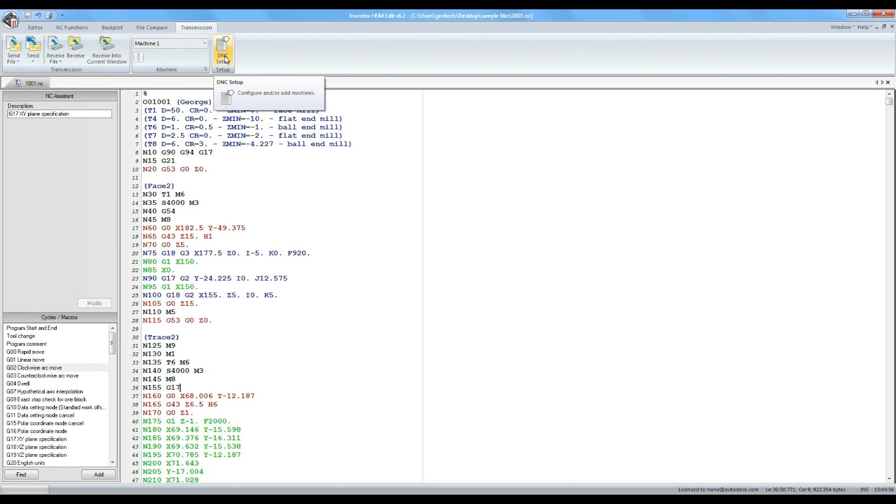And another thing that is built into this Inventor HSM Edit program is a DNC. So this is a drip feed or direct numerical control, and this can be easily set up by just going into these tabs here. So this is used to drip feed the DNC file to older machines which don't have storage which can store, say, more than 1,000 lines. You can just use a DNC and set up the drip feed control direct to the machine, so you can run larger files there. As you know, some machines don't have a large hard drive, and a file with 30,000 lines like this one might be hard to store on an old 1980s machine. So this is where DNC would be useful.

So that's it for the Inventor HSM Edit program. So I'll just close this down. And this takes us back to our normal part. So I've gone through some of the turning strategies that have been added into Inventor HSM. We've got the profiling, the facing, and the grooving. There's a lot of turning strategies. They're really easy to use, and I like the features in here.